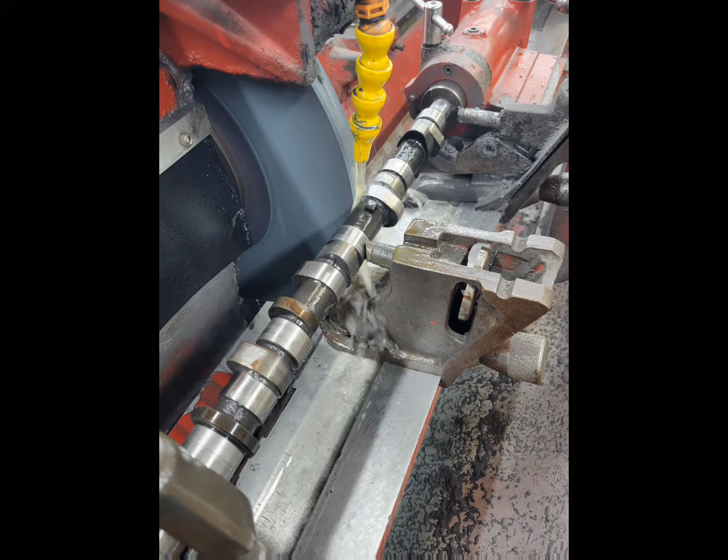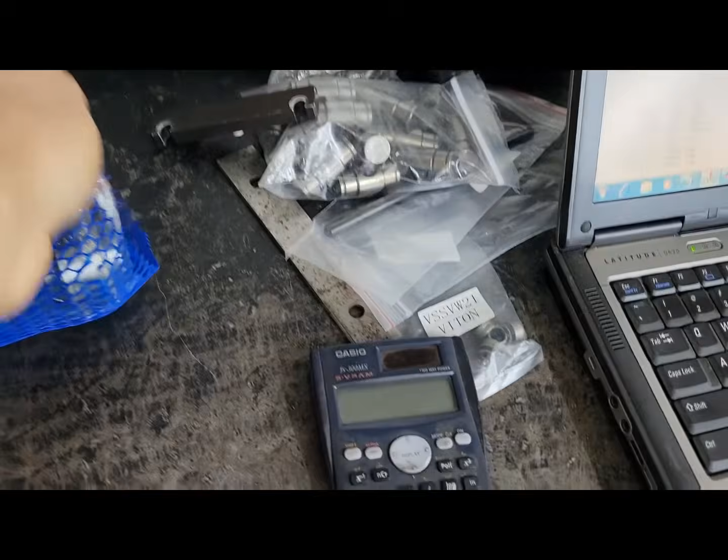Here is the Chinese sloppy copy. I think this is the stage 2 maybe, straight from eBay. Just came in today, and you see the packaging. It's pretty rough. Let's see if it's damaged. Nah, it don't look like it's... It don't look hurt.

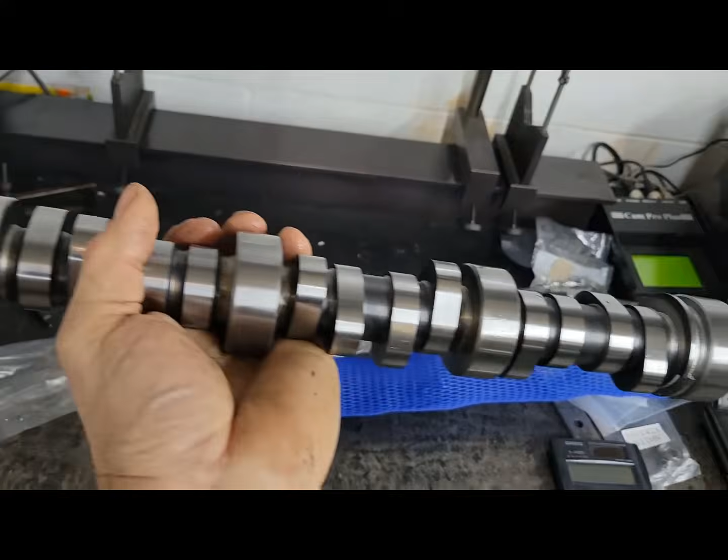So we're gonna run it through the cam doctor and see if it actually is what it's supposed to be, and look at the profile. Alright, so it's in the cam doctor. We're gonna run one intake and one exhaust and look at the duration and the lift, lobe separation, etc., and see what it actually says.

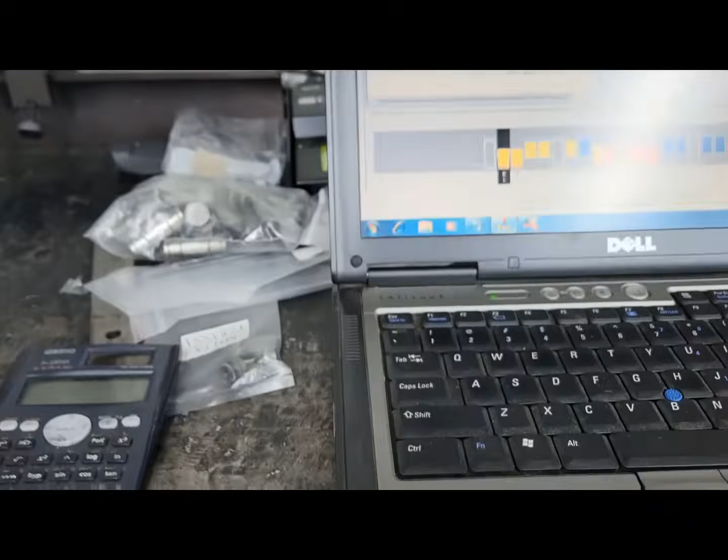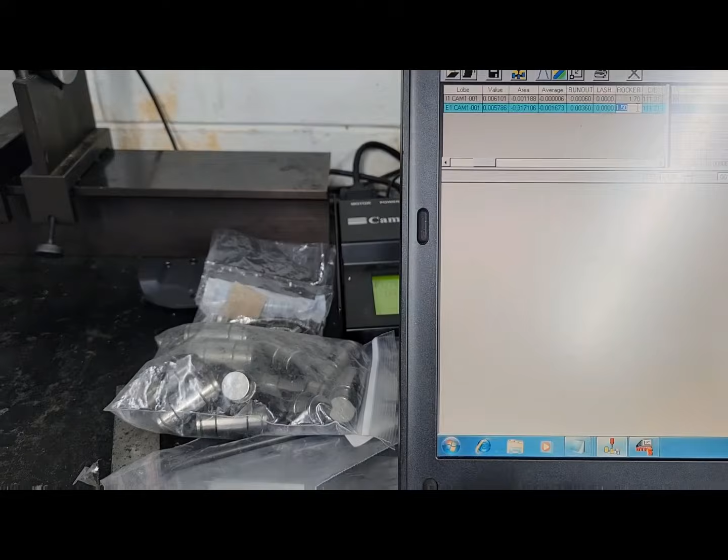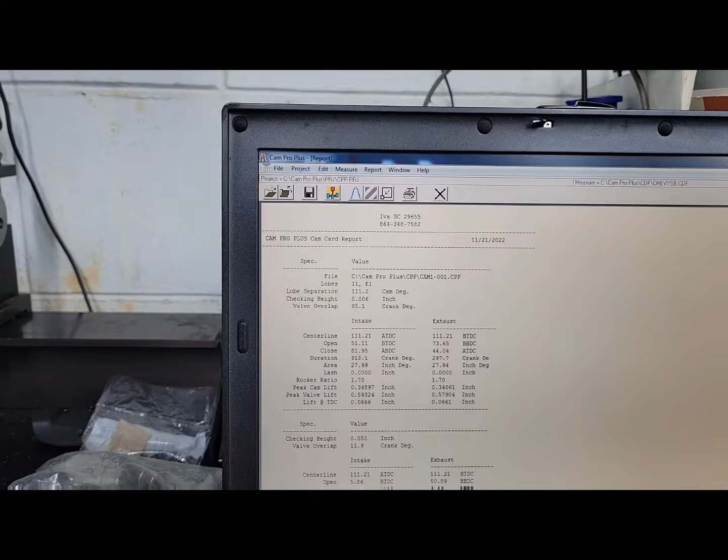So we got an intake and an exhaust run. We got to change some data here. And then we can look at the report. So at 50, it's 232.4 on the intake and 237 on the exhaust. 593 lift on the intake and 579 on the exhaust.

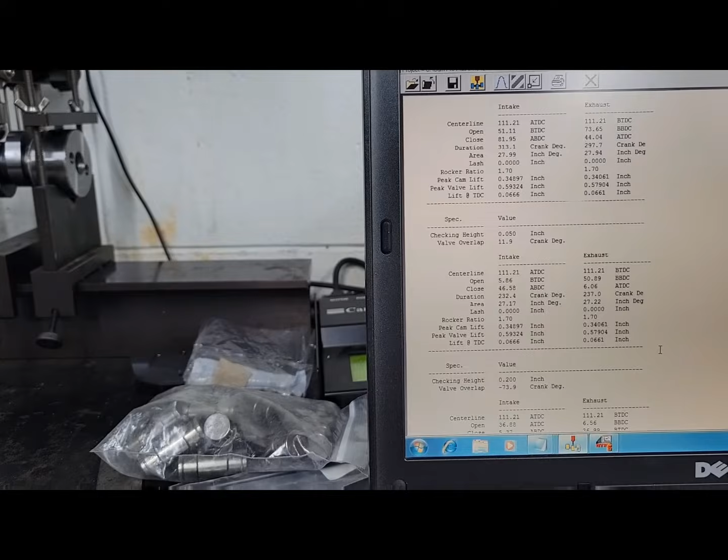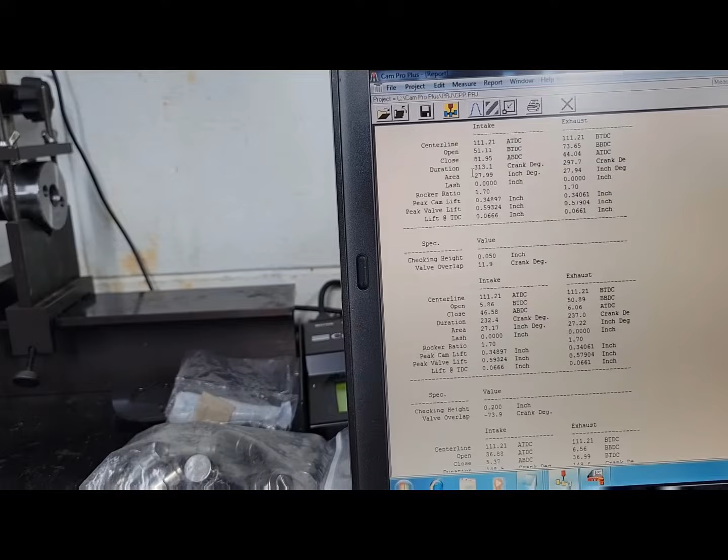But up here, duration at 6, you see 313 and then 297.7. That is extremely slow ramps. I mean, really slow. This profile in our design, the 6 would probably be, I'd have to look at the data, but in the 280s. So that's like super slow.

But I'm sure they just copied something, and I haven't looked at an original Elgin, so it may be really slow like that too. But I'll run one of mine with a similar duration, and I'll show you the difference between all the steps and how much bigger this is and why that's not good.

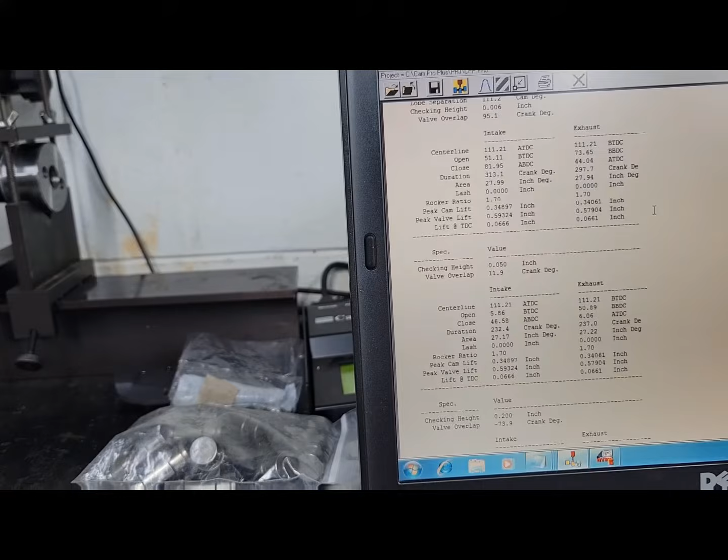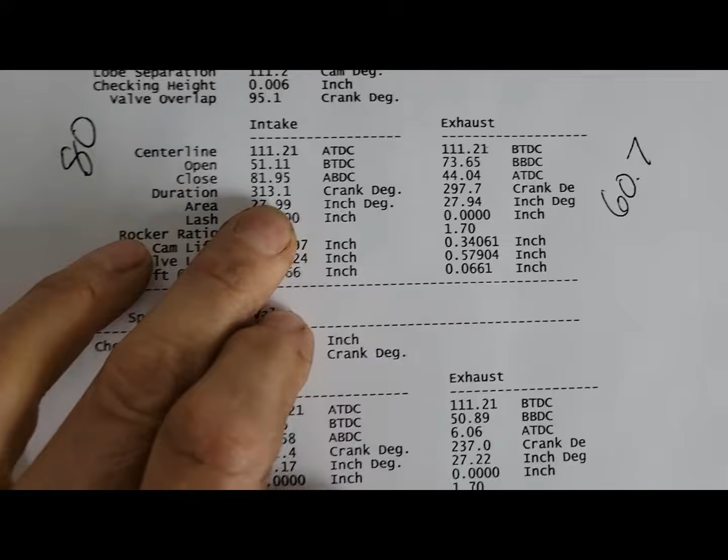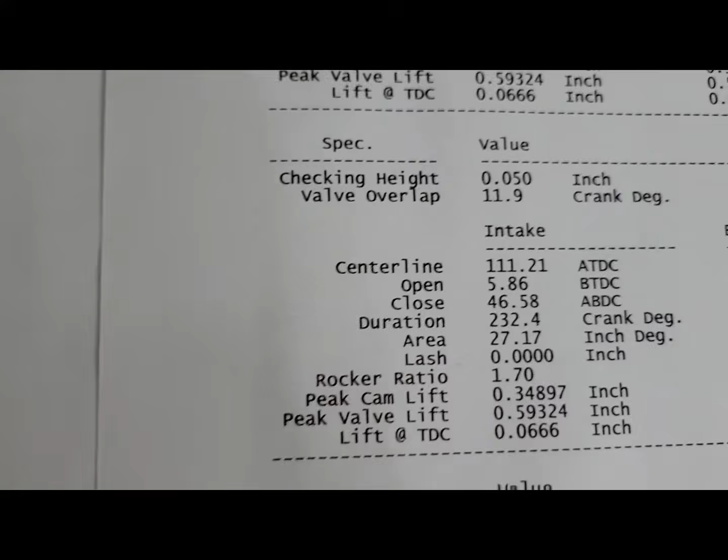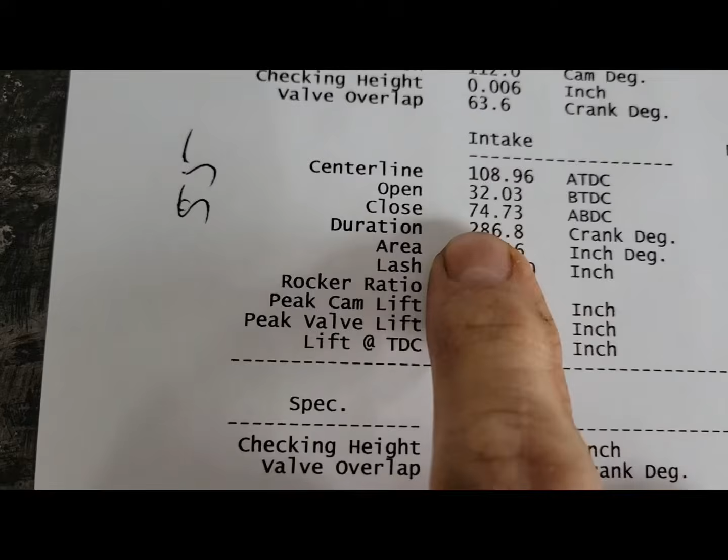Okay, so here is the printout for the China sloppy copy. So we see that 313 at 6 on the intake, and the intake is 232.4 at 50. So on my lobe, 231.8, I mean, we're like super close. But if you look at my 6, 286.8.

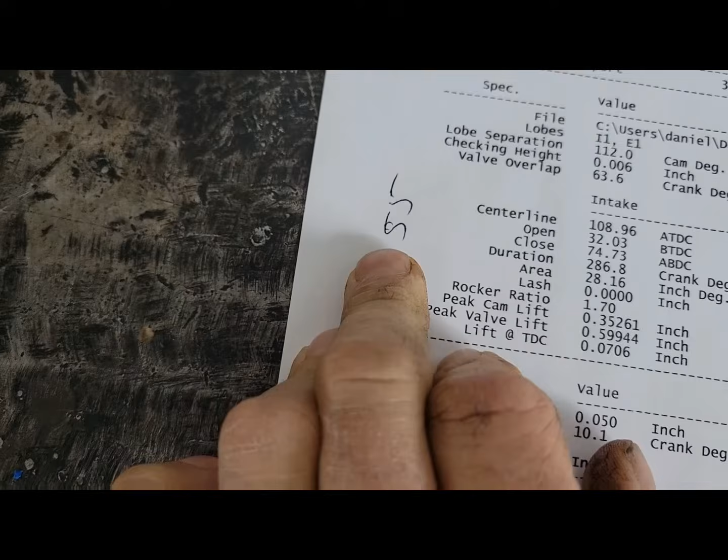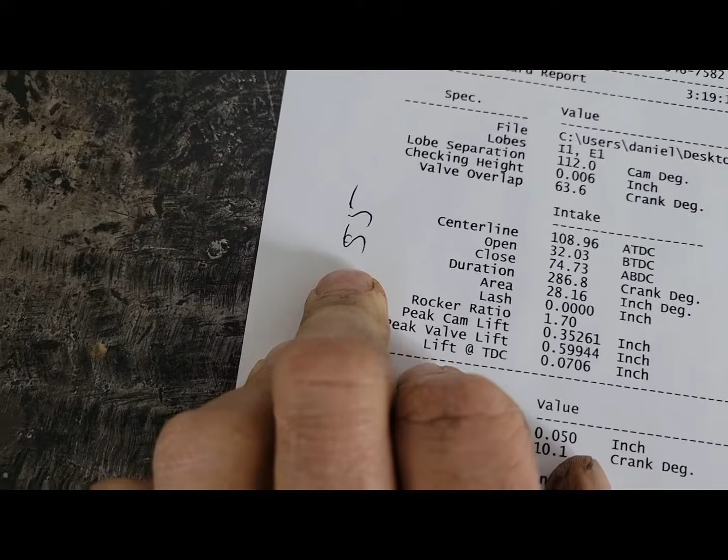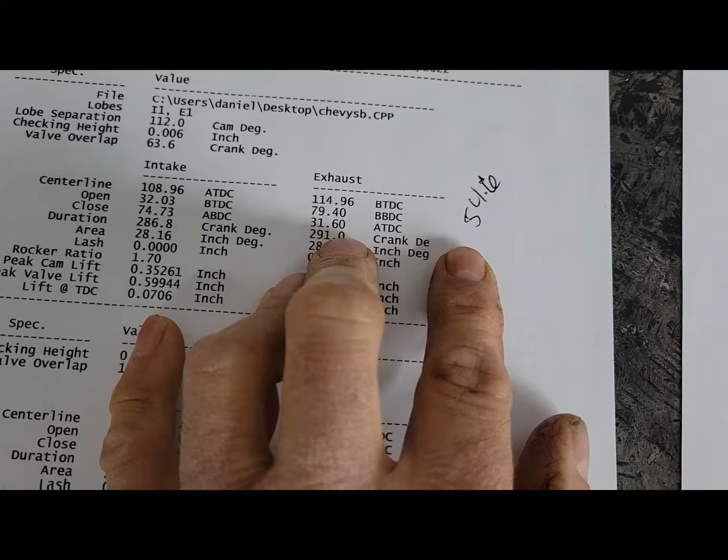This lobe has a hydraulic intensity of 55. The lower that number, generally speaking, the better the engine will run, and the faster the ramp is, the faster it gets from the base circle to the main event. This lobe has an 80 hydraulic intensity. And we see the same thing on the exhaust. This one is 54.6, mine is 54.6 hydraulic intensity, and this one is 60.

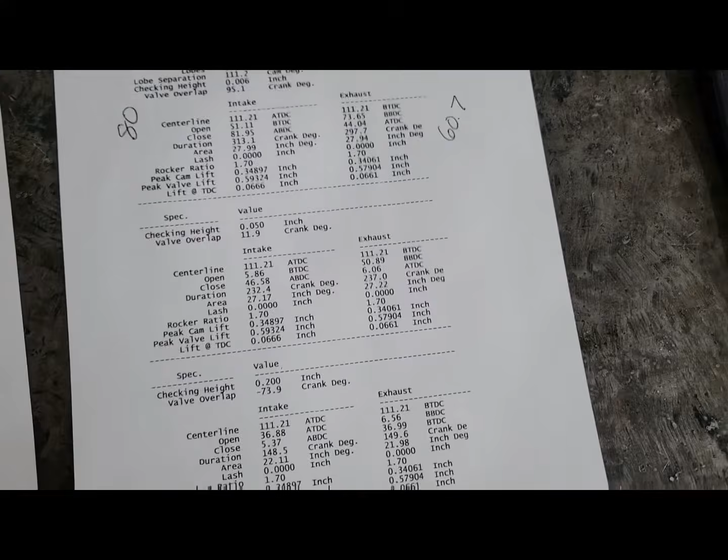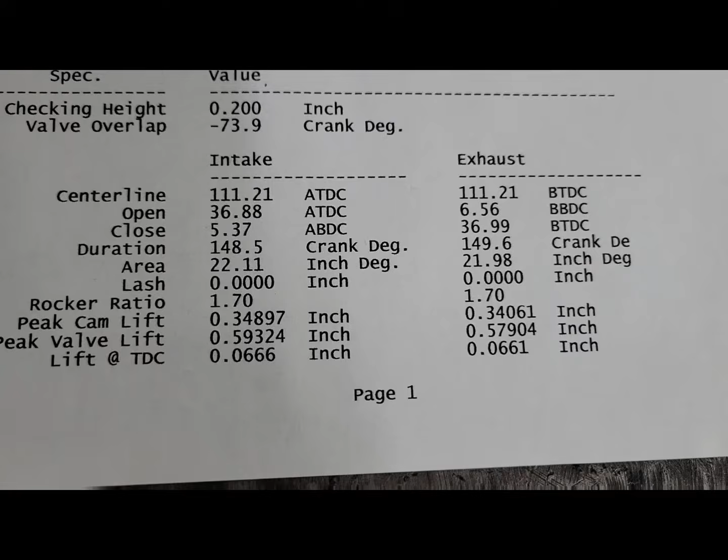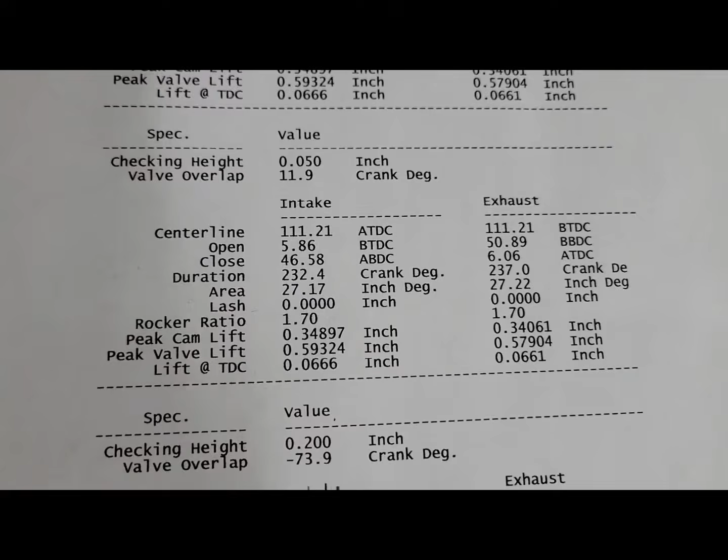The exhaust is a lot better than the intake on this China deal, but I still didn't look up what it was supposed to be, but I'm pretty sure if you look at the lift, 593 and 579, I'm pretty sure it's advertised as 575, 575. So I think they missed the boat there. And I'm not sure on the 50 duration, but I mean, the cam looks okay.

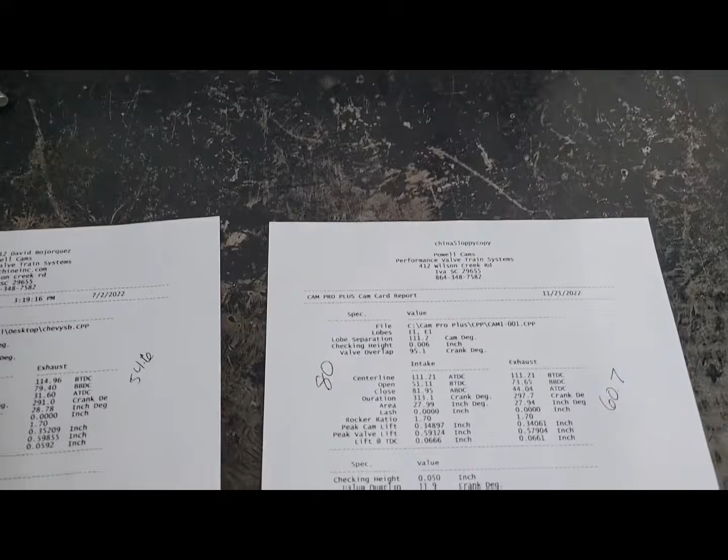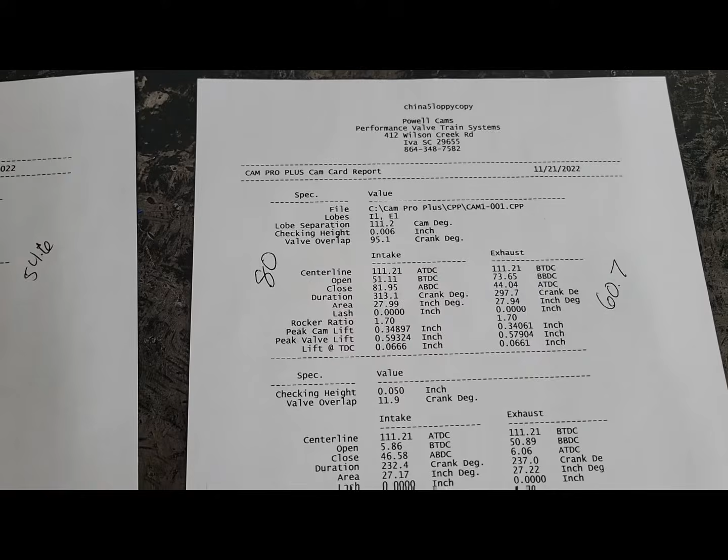I ain't checked the hardness yet. That's the next thing I'm gonna do. I'm gonna check the hardness and just make sure that it is heat treated properly. But it is what it is. If you want a $90 cam or a $100 cam, this is what you're gonna get. Lazy lobes. If you're trying to make power, this ain't the cam. But if you just want to say I got a cam, this is it if you want to save some money. But to each his own.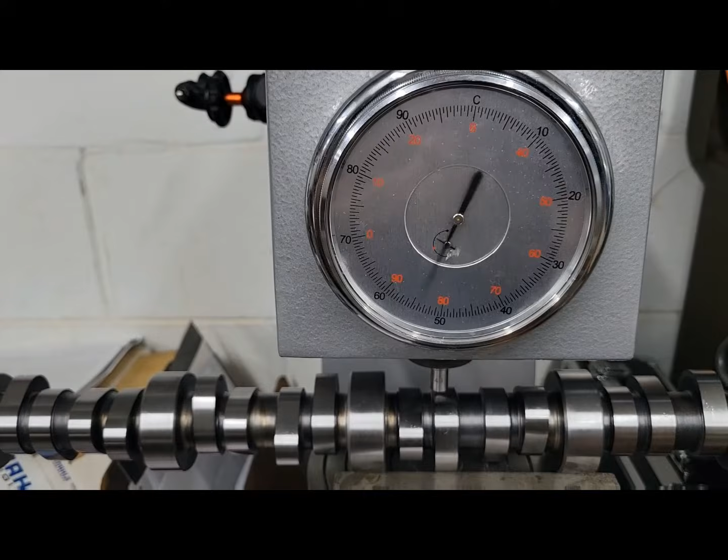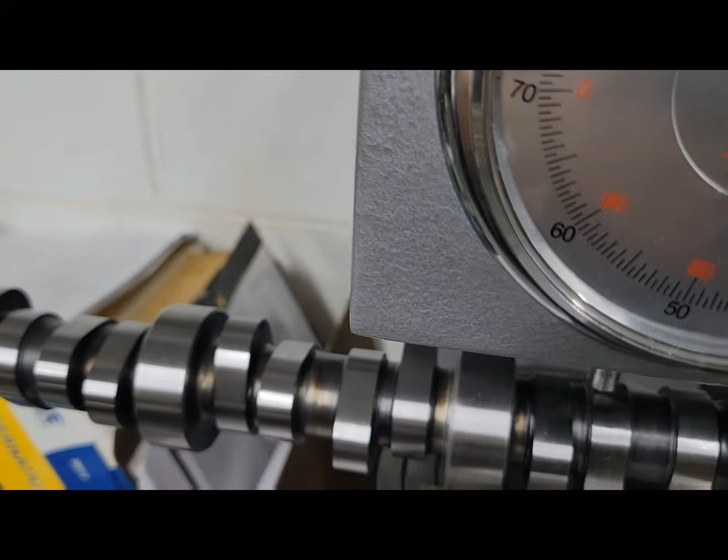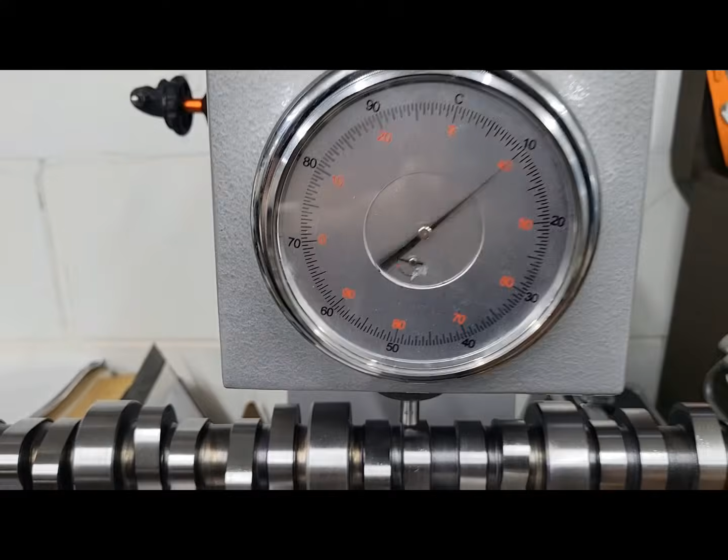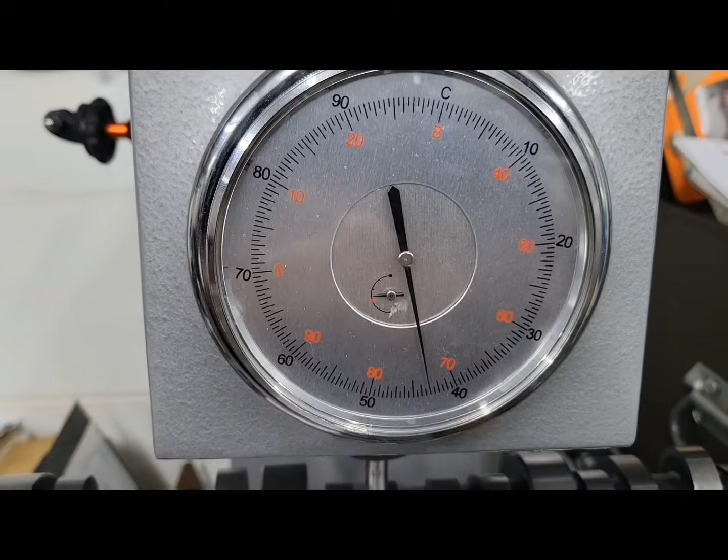All right, so we're over here at the Rockwell tester. Let's just check the hardness and just see. I'm sure it's fine, but let's just check it. Ooh-wee, she's soft. 43. So most stuff that we check as far as billet rollers go are like 58 to 60. So it's definitely soft, way soft.

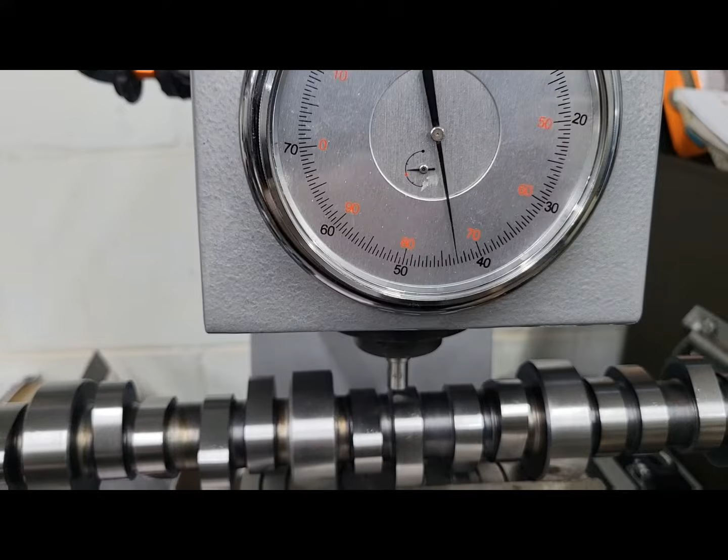Most of the good flat tappet iron cams will check mid to high 40s. So she probably won't live long with some spring pressure. But there it is. So you make your own decision.